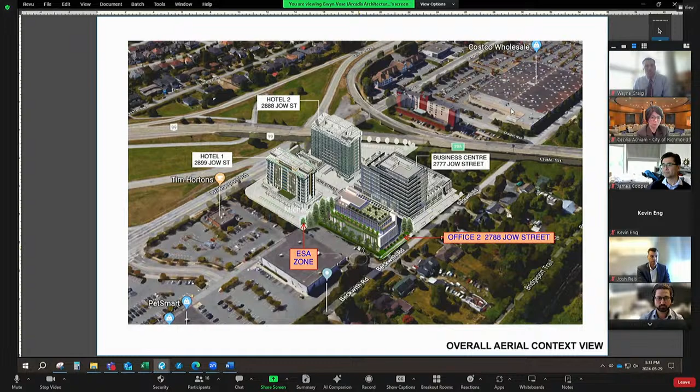Take note of the ESA area here, which we'll speak to shortly. As noted, the business center is built at this point, and the others are under construction. Up here, Office 2 is what we're discussing today, with a portion of land on the built site where there's some surface parking and some accessible stalls, which you can see here in red, and a shared WB17 loading space, which are on the sites adjacent to the site in question that are used by it through covenants.

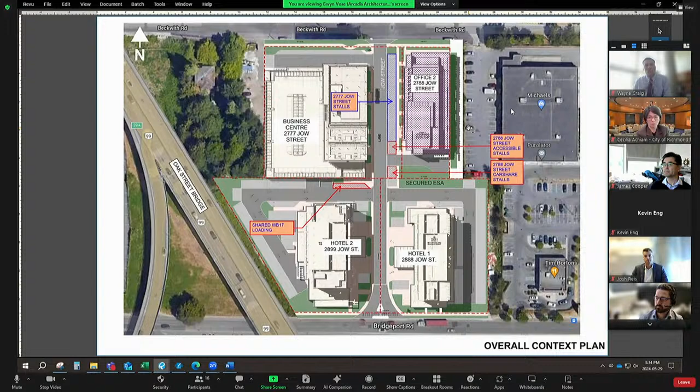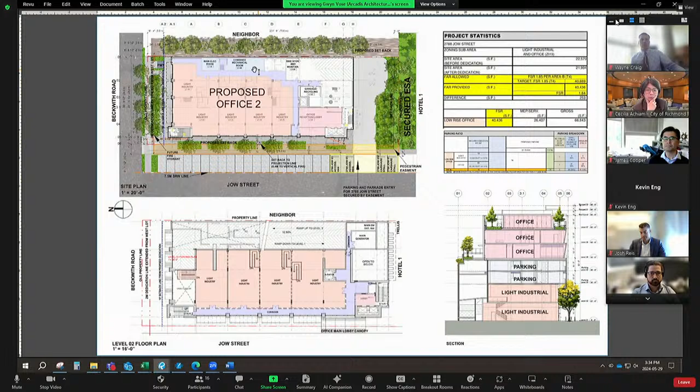The building itself is clean and modern and simple. We'll go through the plans in a moment, but basically there's office at grade, 2 levels of parking above, and then further office above that. The ground level is office and light industrial, as you can see in the plan, as well as a parking access where you drive in and drive up to the levels above, as you can see in the section. There's light industrial on 2 levels, parking on 2 levels, and office on 3.

The parking is skinned by a decorative facade. The first 2 levels have the vertical elements on that fenestration, and on the part that's facing the neighbor, there's a highly decorated wall, which hasn't changed since the last time that we met.

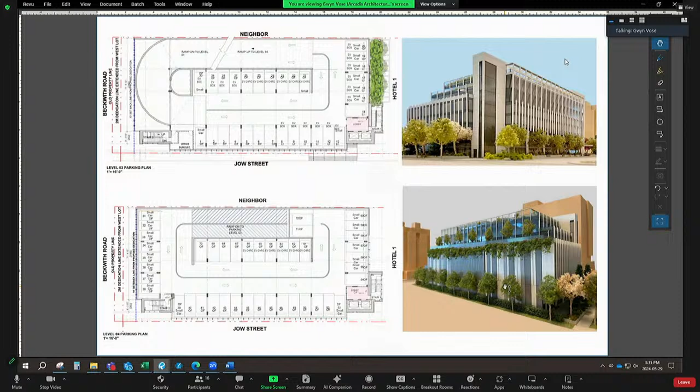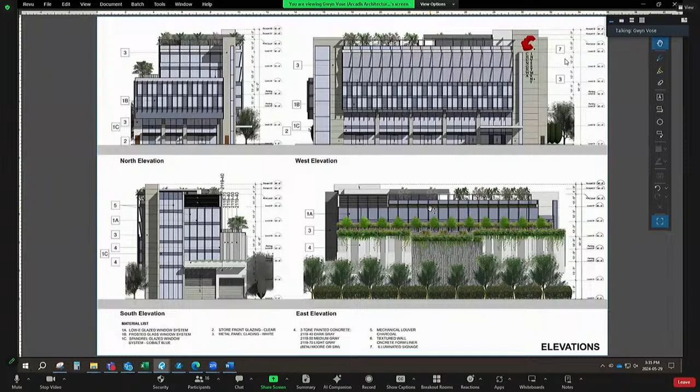And finally to VDZ, where the landscape will be further discussed. I think we're first going to hear a little bit from our environmental professional.

My name. I just wanted to clarify that. Go ahead. My name is Jeremy Nilsson. Sorry, just getting some feedback here. I think we're good now. My name is Jeremy Nilsson.

I'm a registered professional biologist with Keystone Environmental. We've been providing qualified environmental professional services to this project for several years now. Our scope has been specifically to do with the environmentally sensitive area, as indicated in the approximate center of the figure currently on the screen. Just as a quick recap for all involved, this environmentally sensitive area straddles the shared property line with the Hotel 1 site to the south, so it is partially within each of the two properties.

Previously, at the time of the original permitting for these projects, this environmentally sensitive area, which included trees, was identified as requiring protection through the development permitting process. Subsequently, in part due to some changes within both the Office 2 and Hotel 1 site, the trees in the environmentally sensitive area degraded and eventually died.

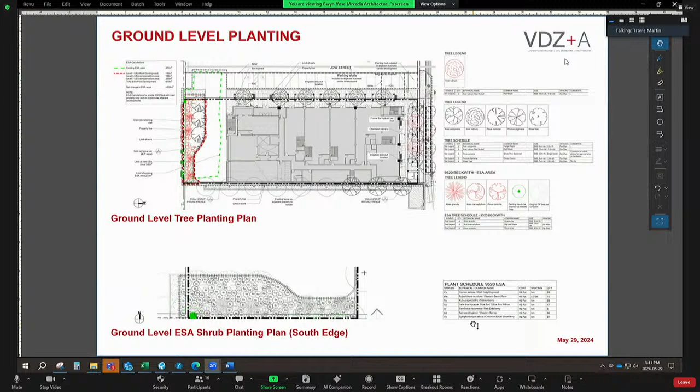In addition, with ESA comes all of the shrub planting, and so we have a shrub plan here with native species. The trees and shrubs on these plans are intended to be appropriate for a changing climate, and so you'll see a shore pine. Pine trees are, as things get a bit drier and hotter, in the tree schedule as well, but it is a local tree. I think we can move to the different levels now.

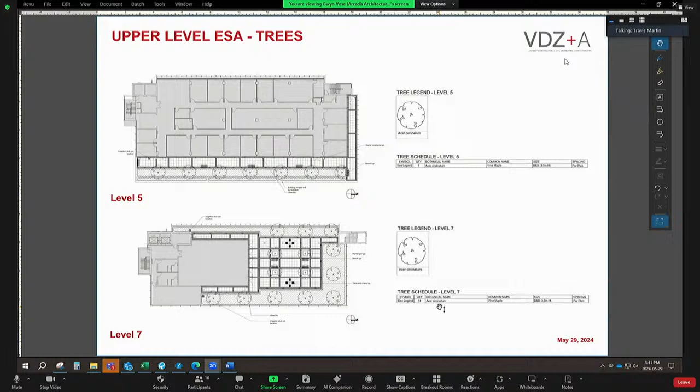The level 5, 6, and 7 all have planting, and they all have native plantings, so they all have an ESA quality to them. It's a little non-traditional, but basically providing more of the local native species on the rooftops. And so there's a total of 21 trees. These are vine maples, which are a native tree, and you can see that on these 2 plans here.

And shifting to the next plan, this is the shrub plans. And so these trees existed on the original plans, having trees on the upper levels. And so, but just making sure that their ESA quality is that improvement that we made to try to bolster the site.

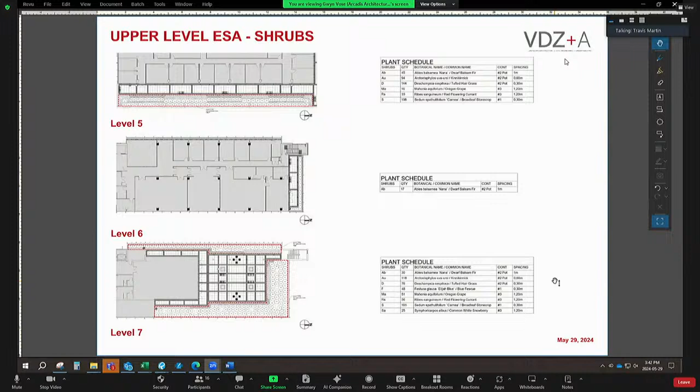And let me just see if there's anything else to mention here. I think that covers it right now. And we'll just wait for more questions.

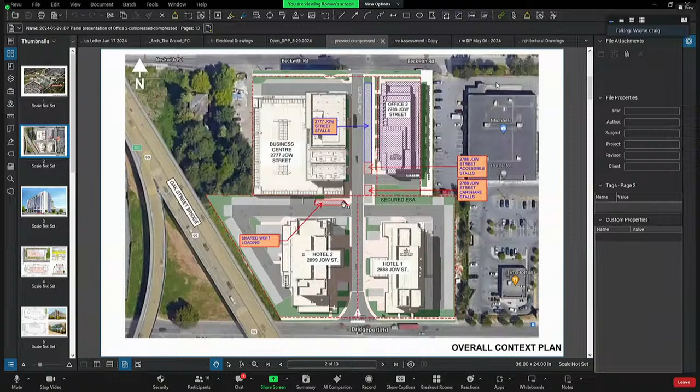My name is Hong Jin. I have a unit in the adjacent building, called Bridgeport Business Center. My unit is A30. I am aware of a building project right in front of this building, and according to the billboard, it's a 7-story office building. As an owner of one of the units, we want to voice our hope about this new project. We would advise that it's not going to be built or modified to more than 7 stories, because that was a condition we purchased that unit under.

Second, I know there is a certain amount of plants growing on top of this building, and I want to make sure the plants are not overly grown, because we like the plants, but we don't want overgrowth. So those are two comments from me: one is the number of stories—according to the plan, 7 stories is not going to be modified in the future for more than 7 stories. Second is the plants should be modest, not excessive. Thank you.